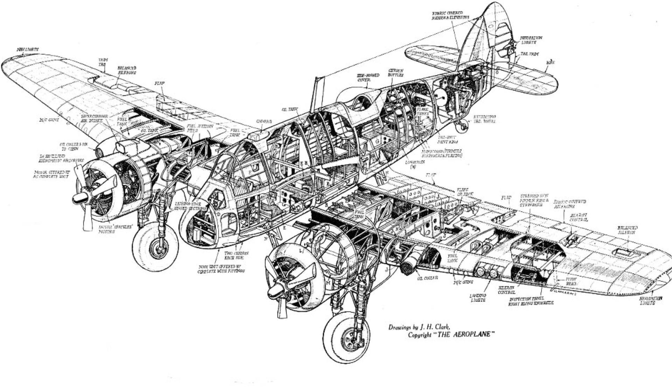So some of the things that go into designing an aircraft: whether you're doing a built-up structure, I find it's very helpful to look at a cutaway of the full-size aircraft first. That gives you an idea of what sort of structure went into the full-size aircraft and ideas where to do things. This was really important for me on the Beaufighter.

Initially, looking at the 3-view of the aircraft, I looked at the landing gear and thought, oh, it's very similar to DC-3 landing gear, that shouldn't be too much trouble.

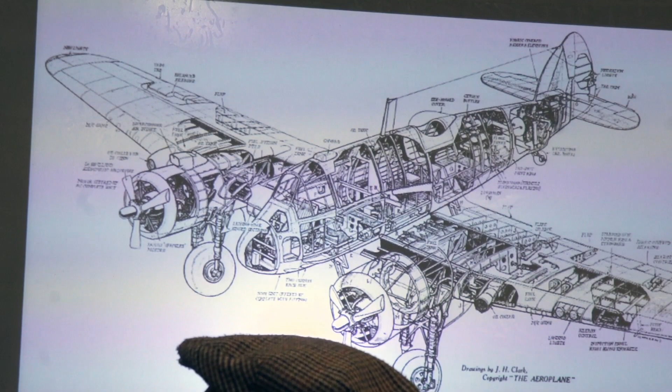It wasn't until I got looking at things carefully, and actually if you look at the cutaway here, originally I figured I'd be able to make a tubular aluminum tube spar that would go right through the wing. Well, it turns out that wasn't going to work, because just as on the full size, this forward spar and this rear spar define the size of the wheel well, and we'll see later how this wheel tucks up in there. There's really no room for a large, or even a smaller diameter, aluminum tube spar. You really have to build it structurally as they did the full-size one, with a vertical web-type spar at the front and back of the wheel well.

Here's what I'm talking about. This is what the wheel looks like when it's retracted. You can see the front spar here, and the rear spar is behind the wheel, and the wheel fills up that whole cavity right there.

Here's the structure that supports the wheel, and this is the oleo. I'll show you some pictures right down the line here. If you look inside this picture, this is what the wheel well looks like when it's extended.

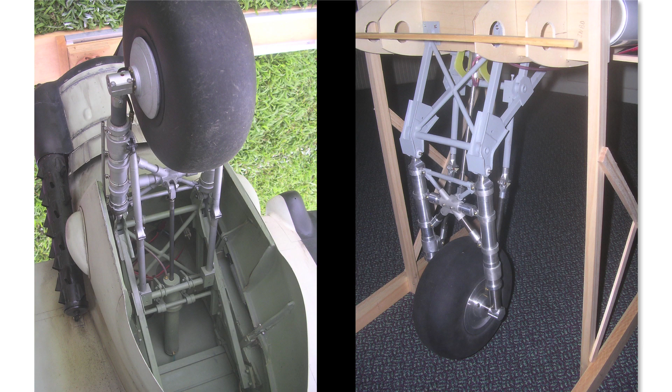An interesting story here is, looking at the 3-view and some pictures of the aircraft, it looked like a fairly simple landing gear. Well, it turns out, as usual, the British tend to take the simplest thing and complicate it to the nth degree. I ended up going up to a museum in Canada and sticking my nose up in the wheel well of a Bristol Beaufighter, trying to figure out just how this landing gear worked. It's genius, but for a modeler, it's pretty complicated.

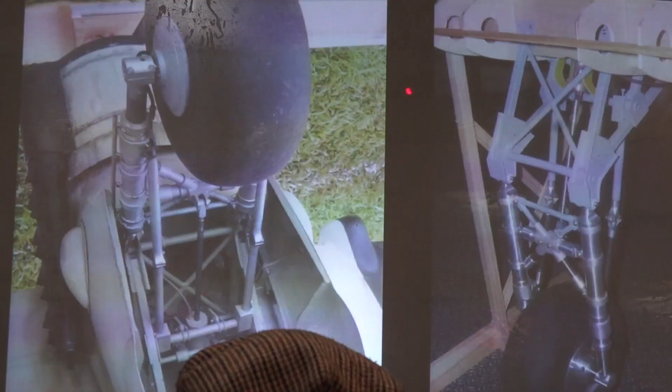One of the things I noticed, let me try to explain. So you get your oleo here, and these are the drag braces. There's a pivot here that folds and goes over center, and it's attached to a torque tube here. But the funny thing is that this is your actuator cylinder here.

On the full size, that's a hydraulic cylinder. The full size uses hydraulics, and that cylinder on the full size is maybe only 3 or 4 inches in diameter, because you can get a lot of force out of hydraulic fluid, even at a relatively low pressure of say 1,000 psi.

I considered using electrics for actuation, I considered using hydraulics, but I ended up discounting everything and went with pneumatics, because electrics, your actuator wouldn't fit. Even with pneumatics, if you take a look, you can sort of see it here, that top of that cylinder is within 1/8 of an inch of the top of the nacelle, on the top side of the nacelle. This is upside down.

In fact, that fitting where the air hose attaches, originally I had it on the top of the cylinder, but I had to block that off and put it on the side of the cylinder because it just wouldn't clear. The way the Brits designed this thing was, I guess the engineers said, this is going to be the shape of the airframe, and this is how long your cylinder can be, so you design landing gear that will fold up into that area, and that's what they did.

The consideration about hydraulics for this was possible too, because I'd get away with a smaller diameter cylinder, but then when the wings disconnected from the fuselage, I'd have to have fittings that wouldn't leak hydraulic fluid, so that was out of the question.

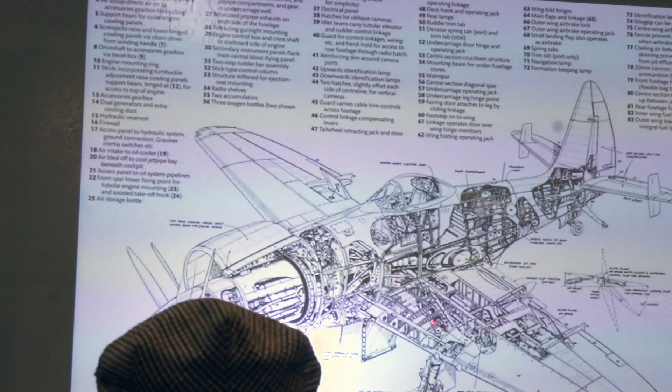So on the Wyvern, I wanted to plug in outboard wing panels on aluminum tubes. I figured, okay, I'll put an aluminum tube on the front side of this spar here. But then when it came to going to the outboard wing, I had to put it on the back side of the spar, otherwise it would be too close to the leading edge. So that was another kind of design problem. The spar jogs, but the joiner is the spar, the tubular spar, and that keeps everything together.

Another thing that's interesting on this cutaway is this detail over here on the outboard flap, and they also have a speed brake that sticks up on the top. So you can get a good idea, if you wanted to design that into your model, what it should look like just by looking at commercially available cutaway drawings or plans.

Here's another look at another 3-view, and this is the only point I want to make on this, is this Yak Russian aircraft. Just see the spacing on the wing ribs there in the wing - you're not necessarily going to keep that same spacing on a model, right?

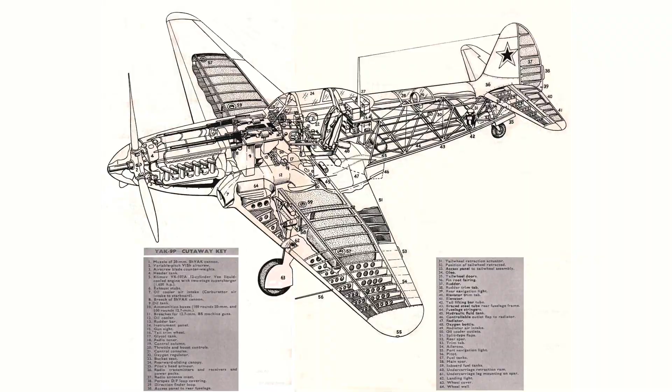What I find is helpful is I'll look at other designers' plans to get ideas, like Valley Aviation and Ziroli plans, to get an idea of what kind of spacing they put on ribs and formers in the fuselage, and just copy. They don't have to obviously have the same shape, but you copy the same spacing, and if it worked for them, it should work for you.

When we are talking about transportability on the aircraft, it's kind of funny. When I was looking at the 3-view and the size of the Wyvern there, of course that fin is huge - probably twice as high as anything you'll see on anything else. And I thought to myself, well, if I'm going to be moving this fuselage up and down stairs and through doorways with that giant fin, for sure I'm going to smash that fin every time I do it.

So I decided to design the fin of the Wyvern so it was removable. What I did is I built in 2 carbon fiber rods, quarter-inch carbon fiber rods, that are glued into the ribs of the fin, and they slide into tubes that run down into the sub fin here in the fuselage, and then through the wheel well I was able to put 6-32 cap screws that would hold everything together.

Another interesting point for me is if you're building a scale model, and of course I fly in competition, so I want to look as realistic as possible, but I like to hide switches and mufflers and anything that's sticking out that's not to the original, and I kind of use that same philosophy here with the parting line.

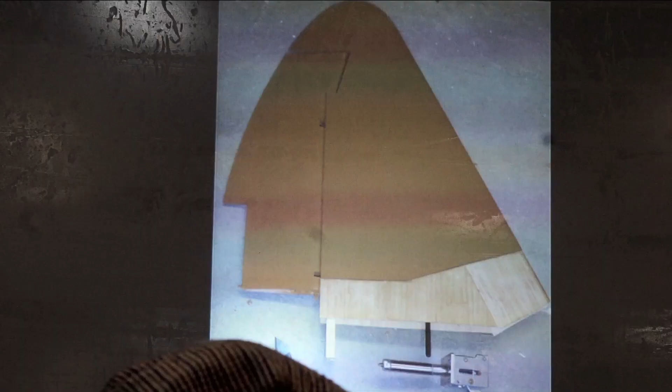I could have gone straight across, but on the full-size aircraft there was a construction joint here where the full-size fin was on, so I copied that position, and if you look over there on the model, you wouldn't know that fin's removable unless I told you, because I did it along a construction line, and it kind of blends right in as to where things should be.

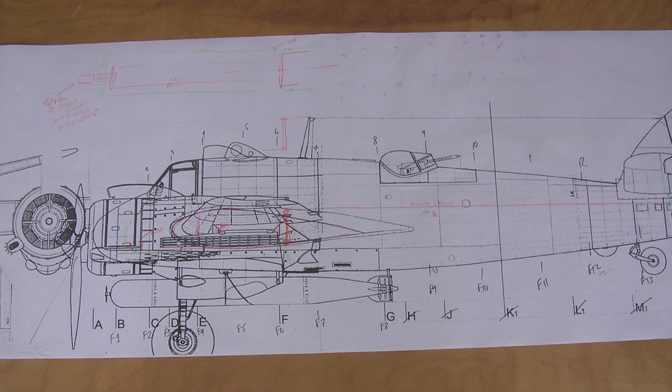I knew just from looking at the 3-view that there's no nose sticking out the front of that airplane, right? So a key design consideration in making a Bristol Beaufighter, and that for me was the challenge, was being able to make that tail as light as possible, because if you didn't, you may end up not having enough room up front to put enough weight to get the balance correct for it to fly. I'll show some slides further down on how I managed to achieve a super light tail.

That was a focus I kept throughout the whole project, to keep the tail as light as possible. So during the design process, I said, okay, I'm going to have to put heavy things like servos and batteries up as far forward as possible. So that's what I ended up doing.

I figured the only place to put those things in the fuselage — and if you notice here, I had this photocopied so I could see through, almost like an X-ray view of the nose here, through the nacelle. So any batteries, receivers, and servos that are heavy would have to go in this area, under the cockpit. And here's a top view of my scribbles.

I came up with the idea that, since the Beaufighter is a twin, you're going to want redundancy on the rudder, so you'll need 2 servos driving it. How can you do that? Well, it turns out SWG has a mechanism, we'll see a picture in a second, that allows you to have 2 servos — if one jams, the other will provide power.

So I knew I wanted 2 rudder servos up front, right? And I figured I also want the elevator servos up here to move them as far forward as possible, so I put them on either side of the rudder, with carbon fiber rods going back to arms behind the wing, and then push rods going up this way.

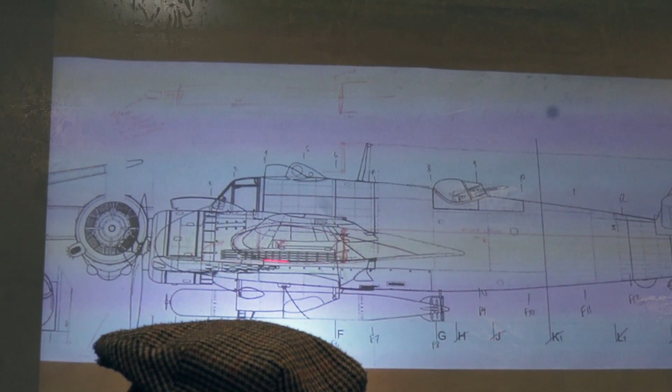Originally, I thought I'd have cables from the rudder go to a torque tube arrangement here with arms that would transmit those cables from this push-pull to this push-pull up here, directly back to the rudder.

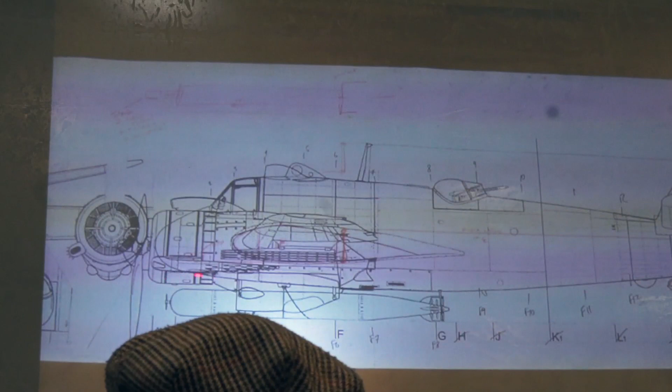I ended up, when I actually built it, sacrificing a little bit of weight for simplicity — I had the cables run back to here, and then a little torque tube back here on the final version. I actually didn't have enough room up in the nose, so I put the servos back here, behind the rear spar.

No room for elevator servos here, so they went back behind. I took a little bit of a sacrifice, put them back behind the spar, and that wasn't too much of a hit. But what I'm getting at is it's just part of the design process.

You come up with a concept on how big it's going to be and where you're going to put things based on balancing the aircraft, and sometimes you have to modify it during the build.

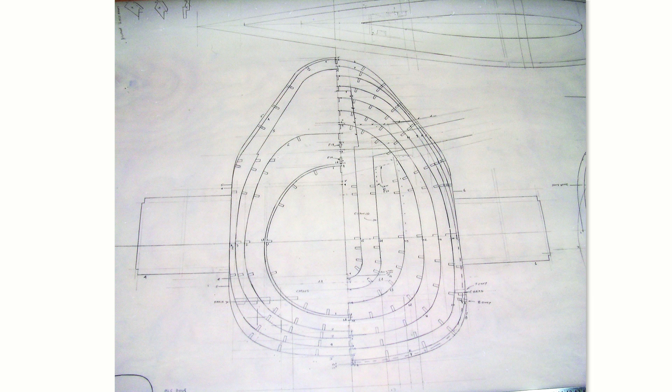Here's another slide of what I'm talking about when it talks about building from scratch and lofting formers and ribs. Anyone know what the term lofting came from? Shipbuilding, right, exactly. Back in the old days, they would have these huge sail lofts down by the waterfront where they'd sew sails together, but they'd also use them to design ships, the shape of the bulkheads for the ships.

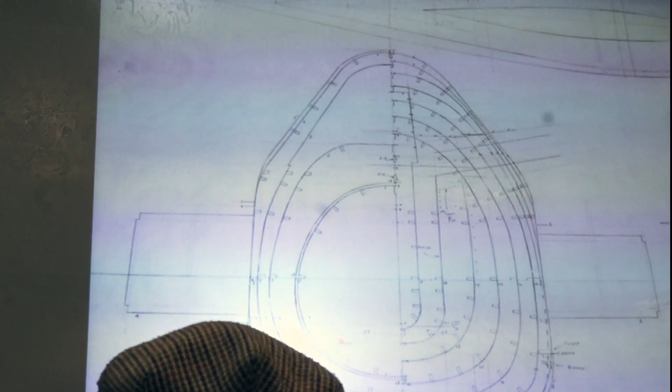They would actually draw it out in chalk on the floor. So lofting is a process where you want to make a smooth surface, and you want to have some structure inside, so you do what's called lofting of the ribs. Here is my master drawing for the formers in the fuselage, with a vertical datum and a horizontal datum. This is looking straight on at the aircraft. These are the formers that move from the widest part of the fuselage forward up to where the radome is on the front, and these are the ribs that run down the tail towards where the fin post would be.

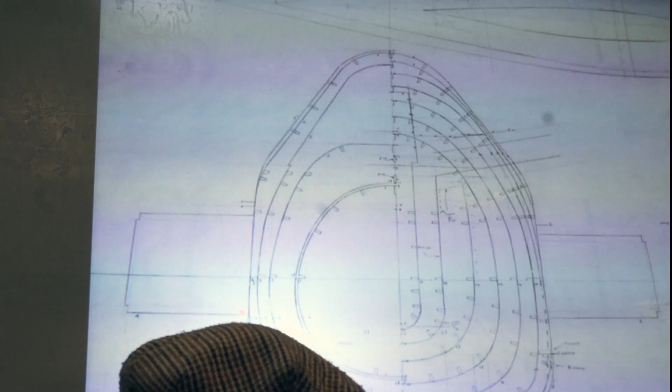So with the French curve, you run smooth curves around there, and there's no reason at this time to draw a left and a right for all the formers, because you're going to use this to trace through your drafting vellum on a larger sheet where you have all your formers laid out, with vertical and horizontal datums. What I do is slide this sheet underneath the vellum and trace through around, say I'm doing this former here. I'll trace that through, then slide this sheet out, flip it over, and the vellum is thin enough that you can see through this line on the opposite side and trace that around there.

You do it the same for all your wing ribs. Then you have a set of plans that you can cut out parts from. If you want to send to a laser cutter, you can do that these days, or you can cut them out yourself from the bandsaw. But that's kind of the idea of building from scratch and lofting formers and ribs.

An alternative to that, as I did on the Voodoo that I mentioned earlier, was using a CAD program. This is a screenshot of the surfaced model of the Voodoo. This is only a virtual picture, not an actual picture. This is what the CAD program allows you to do, and you can rotate it around on the screen. It's really neat. You can look at the front, the side, any angle you want, and it looks real.

But it's not until you spend another 3 years that you end up with that. The advantage to CAD, especially with a design like a jet, is that it wouldn't be practical to make that jet out of traditional built-up structure, because you've got engines that need to go inside the fuselage, you need ducting, exhaust pipes and things like that. Also you want a very, very strong structure that's also very light, so that lends itself to a hollow type composite structure.

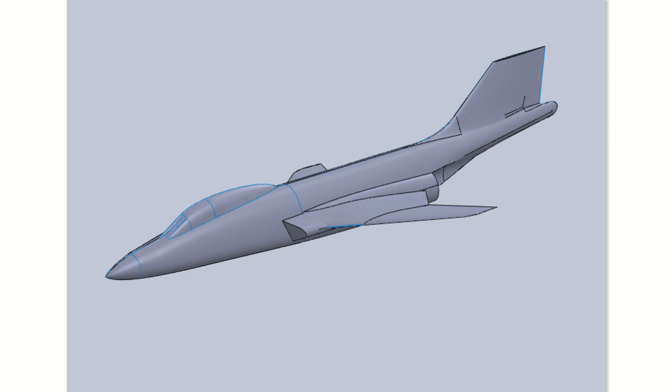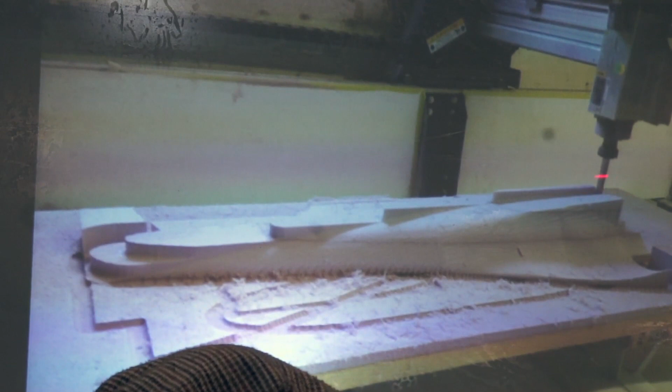The router is about 8 feet long and about 4 feet wide, and this is a 5/8 end mill, ball end mill, and it routes that foam in no time - I think it took maybe 20 minutes to route that whole thing. So I do each side of the tail in two halves. The center fuselage, I think, was a top and a bottom, and the front fuselage was actually in three sections, was a left and a right.

So it's quite a lengthy process, but the stage I'm at now is putting detail on that plug, and after that the molds will be made and the finished product can be made.

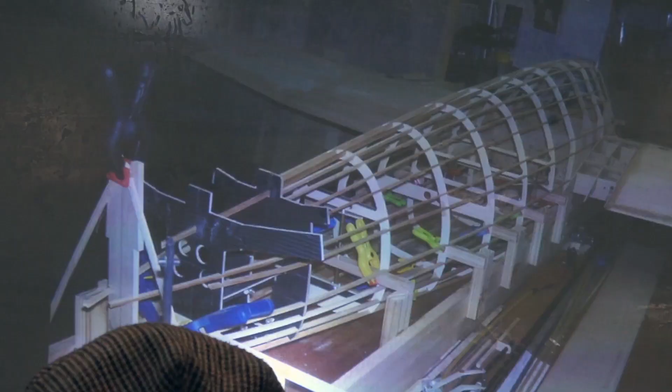So what I did was dream up an external crutch, using 1x4 pine boards, one on each side, with support structures, these little angle pieces, that support one stringer down each side, a quarter by eighth stringer. I was able to add the formers to the stringers and glue them on, then sheet the top all the way down, and then remove the fuselage from the external jig and sheet the bottom without any twist being built into it. So I ended up with an optimally lightweight structure that was the best I could do for the tail end.

Another interesting note on this picture is these bulkheads here, which support the horizontal stabs and the fin. The horizontal stabs on the Beaufighter have dihedral, so there were two of them here, and normally you'd make those out of plywood to make them strong, but that wasn't a factor here. Again saving weight, I used eighth-inch end grain balsa, laminated carbon fiber on both sides, and ended up with a structure that was super light but stronger than plywood. I did that with both this former here and this one here.

Another interesting thing is when you design, try to get structure to do more than one task. This bulkhead or former here was also the attachment point for the tail wheel landing gear. The tail wheel retracted forward on this airplane, so I designed it so that this was not only supporting the stab and the fin, but also supporting the tail wheel, avoiding any extra weight or extra structure in the back.

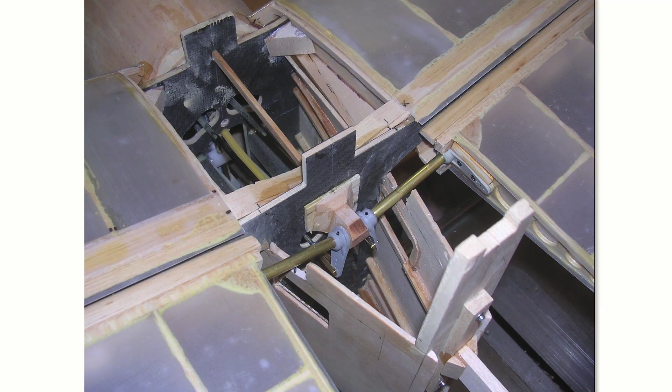To beat you up one more time on keeping the structure light, this is again another picture of the tail area on the Beaufighter, an example of the skin I use, called flight skin. It's a very thin fiberglass skin that comes in rolls, only about 7 to 10 thousandths of an inch thick, but very smooth. You glue it to the structure with medium zap, and it's super strong.

You build a traditional balsa wood structure underneath and put this on. The beauty of this is that it's pre-finished, you can put paint right over it, you don't have to fill, sand and paint or do anything like that. The only downside is it won't go around compound curves, it will only curve one way.

So on the leading edge I ended up using chrome tape to make it look smooth and like a metal part there. The other point on this slide is this mechanism here, the torque tubes for each elevator half coming down to arms, and the rods go forward to the servos further forward in the fuselage.

Here's something else to talk about: considerations for when you scratch build an aircraft, whether you'll be able to get commercially available pieces and parts. That applies to pilot figures, wheels and retracts, but it's not likely that you'll be able to find a canopy that's the correct size you need.

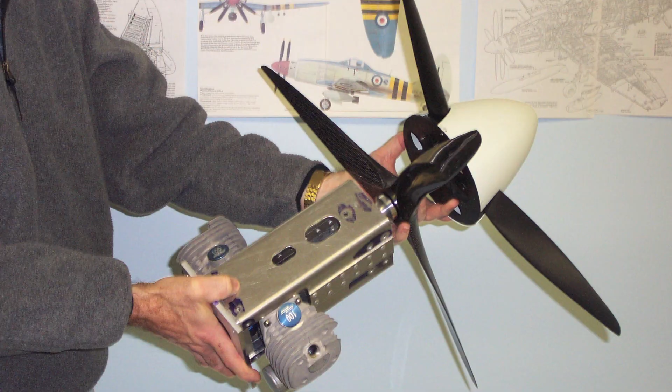Oh yeah, this is just to finish up—this is if you're interested in what goes into the front of that Wyvern.

I knew that the design challenge for the Beaufighter was keeping the tail light. The design challenge for the Wyvern was the contra-rotating propellers. The full-size aircraft had two 4-blade propellers, so a total of 8 blades spinning around. I wanted to get that illusion of a lot of blades spinning, both in video and in pictures of the aircraft flying.

So I designed this. First, I had to extend the prop shaft out 6 inches from this standard gas engine, a BME 100. I decided to make the rear propeller driven by the engine, but the front propeller was just going to windmill, giving the illusion of many blades spinning out front.

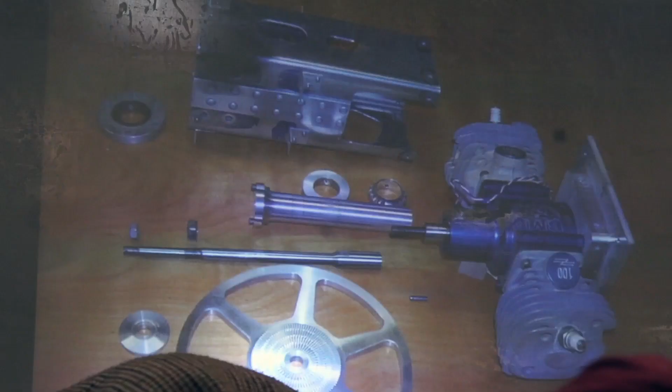These are all the pieces that go into that structure. I started with the engine here, and here's the extension shaft. How do you hold the extension shaft to the engine? You need a steel rod down the middle. And how do you hold the propeller on? You've got a nut that screws on here, and then another sub shaft out here that holds the windmilling propeller on the front.

How does it all go together? You can't have a 6-inch shaft sticking out the front of your engine—that won't work. So you need a box structure that supports this. Here's the box structure; the engine bolts to this back plate, and this box structure bolts to the back plate as well, with the shaft running through the middle. Here's a support for the front bearing that screws onto the front of this plate. The spinner goes on, the propeller goes on and is screwed on—front propeller, good to go. That took a lot of testing, was a lot of fun.

I think designing and building from scratch can be very, very satisfying. It can be frustrating at times, but the rewards are well worth the effort. You've got to be passionate about the subjects you choose, and you've got to really want to finish the project, because there'll be times when you hit a brick wall and think you'll never finish it. The best thing I've found to do right then is think of it as a journey, not a destination. It's kind of like eating an elephant—one bite at a time. Just take each task and treat it as a number of smaller tasks instead of one huge project.